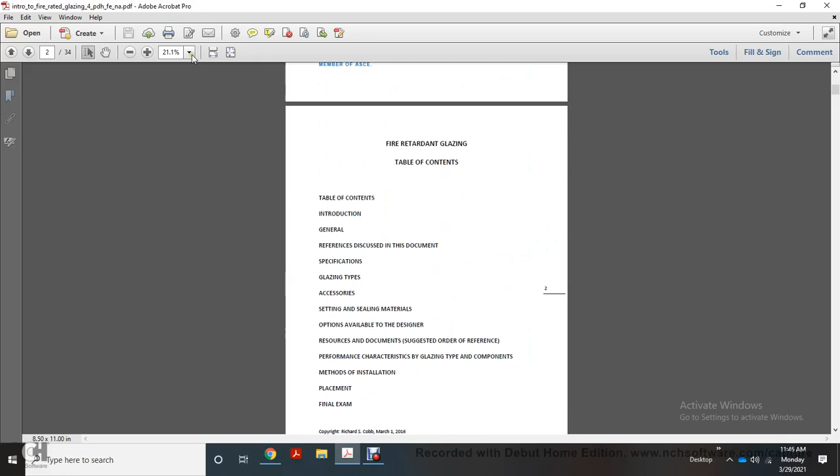Alright, fire retardant glazing table of contents. Table of contents: introduction, general reference documents discussed in this document, specification, glazing types, accessories, sealing materials, options available through the design and resource documents, suggested order reference, performance characteristics, glazing type, components, method, installation, and placement, final exam.

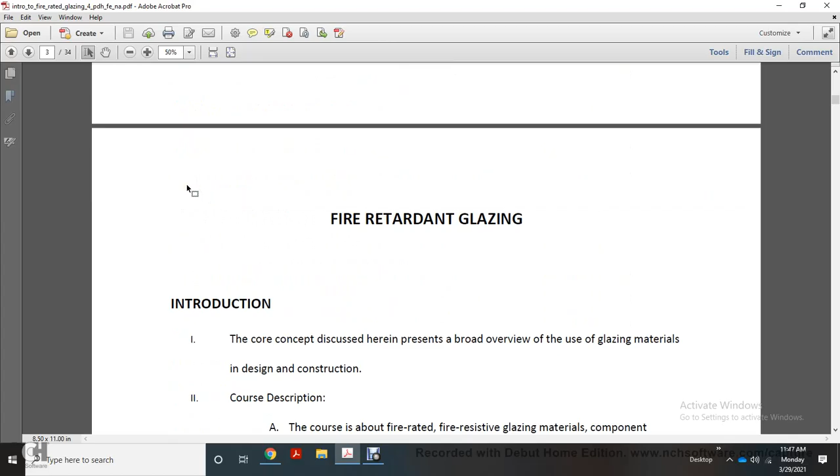Fire retardant glazing introduction. The core concept discussion here presents a broad overview of the use of glazing materials in design construction. Course description: this course is about fire-rated, fire-resistant glazing materials, components, system assemblies, including provision for separation of adjacent spaces and structures. Information supports determination of requisite measures of protection against temperature rise accompanied with flame and smoke migration.

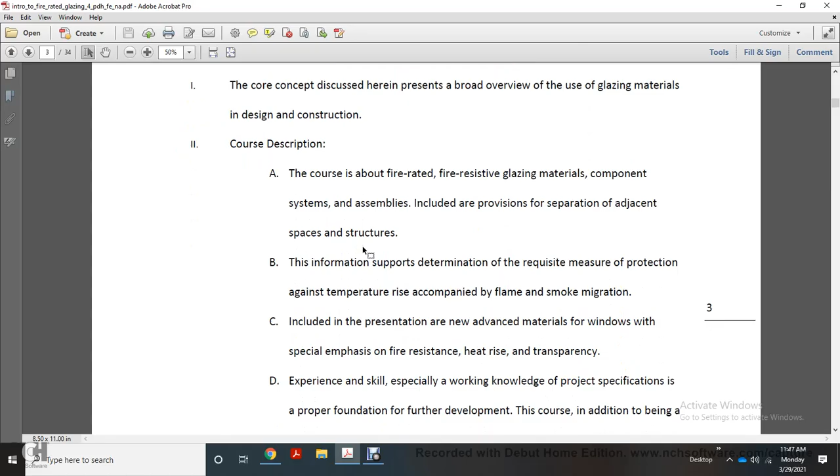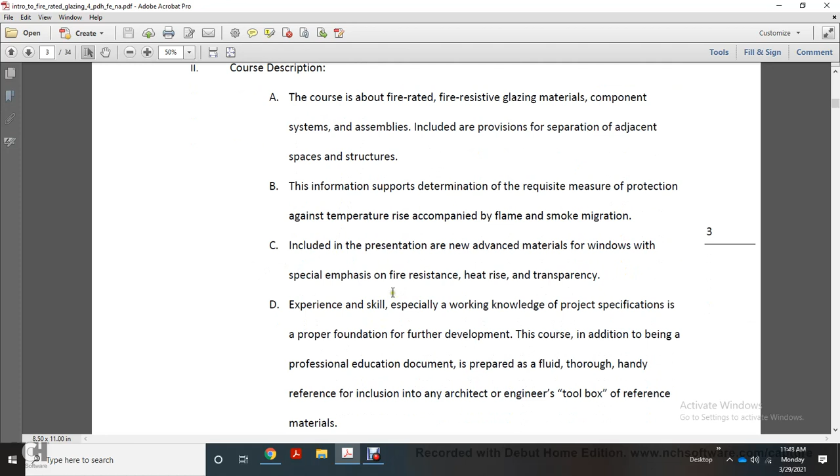Included in the presentation are new advanced materials for windows with specific emphasis on fire resistance, high heat rise, and transparency. The experience and skill, especially working knowledge of specification, provide a proper foundation for further development. This course, in addition to being professional education, is prepared as a handy reference for inclusion into the architect's and engineer's toolbox of reference materials.

Historical perspective: in 1500 BC, glass making was begun in Egypt. 3,000 years later, in 1830, John Hartley, a Scotsman, working through W.E. Chance in England, began to manufacture sheet glass. For 2 years, John Hartley began experimenting with a new German plate glass manufacture method. However, John's death in 1833 paved the way for his sons James and John.

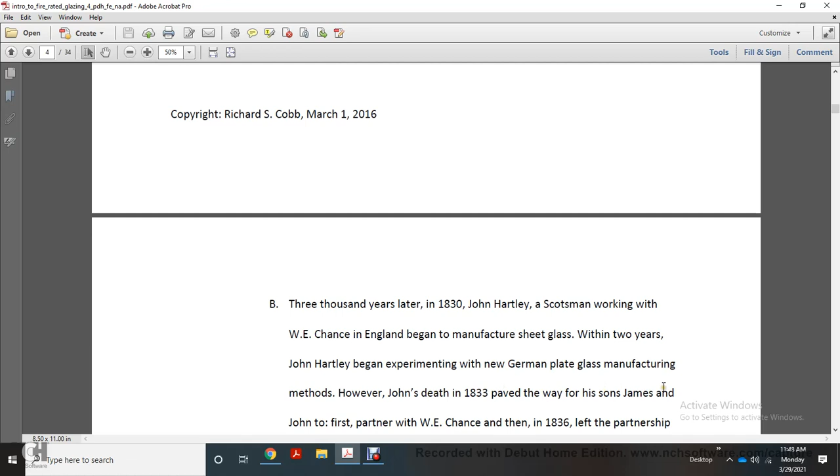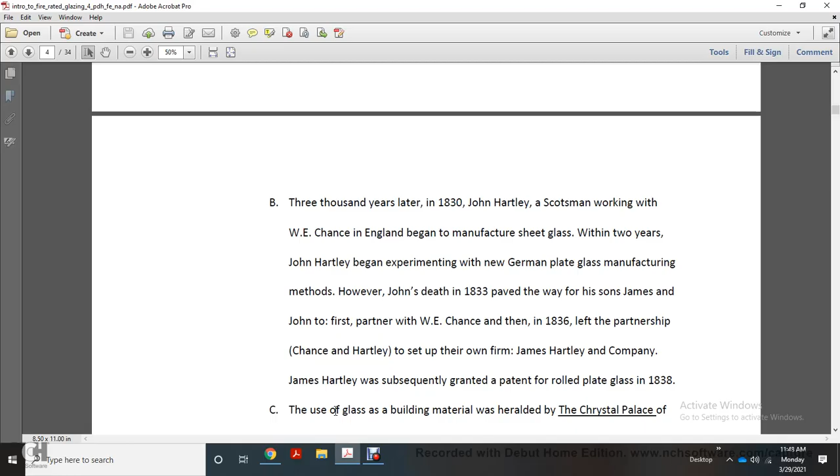First partnered with W.E. Chance, then in 1836 they left the partnership of Chance and Hartley to set up their own firm, James Hartley and Company. James Hartley was subsequently granted a patent for rolled plate glass in 1838. The use of the glass material was heralded by the Crystal Palace of 1851, built by Joseph Paxton to accommodate the Great Exhibition. In 1898, Pilkington invented wire glass for safety and security.

However, note that since wire glass exhibited low impact resistance, since 2006 the IBC has prohibited its location in all facility types. Float glass for modern windows was first proved profitable in 1960. The method of making float glass consists of the formation of a continuous sheet of glass upon a molten tin bath, which results in a uniform flat surface. Most float glass is soda lime glass, also available is borosilicate and flat panel display glass. Products superior to glass include the use of silicone and ceramic transparency.

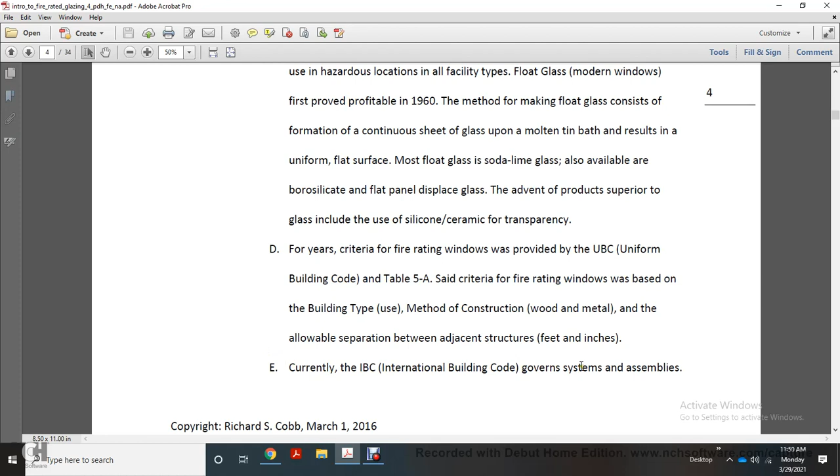Criteria for fire rating windows were provided with the UBC, Uniform Building Code. Table 5-A. Said criteria for rating windows based on window type, building type use, method of construction, wood and metal, and the allowable separation between adjacent structures in feet and inches. Currently, the IBC, International Building Code, governs systems and assemblies.

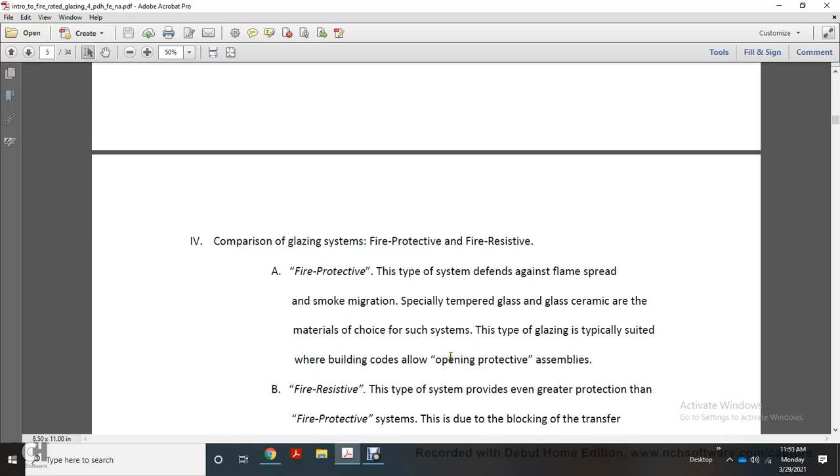Comparison of glass glazing systems, fire protective and fire resistive. A fire protective system defends against fire, flame spread, and smoke. Specially tempered glass and ceramics are the materials of choice for such systems. This type of glazing is typically suited under the building code for opening protective assemblies.

Fire resistive: this type of system provides greater protection than the fire protective system. This is due to blocking the transfer of conductive as well as radiant heat. Glass glazing of this type is suitable for applications where building codes require enclosure of interior space by fire-resistant enclosures. Examples include fire separations of 1 hour or more that also require meeting or exceeding the temperature rise guidelines, especially stairwells, exit corridors, or other required fire barriers.

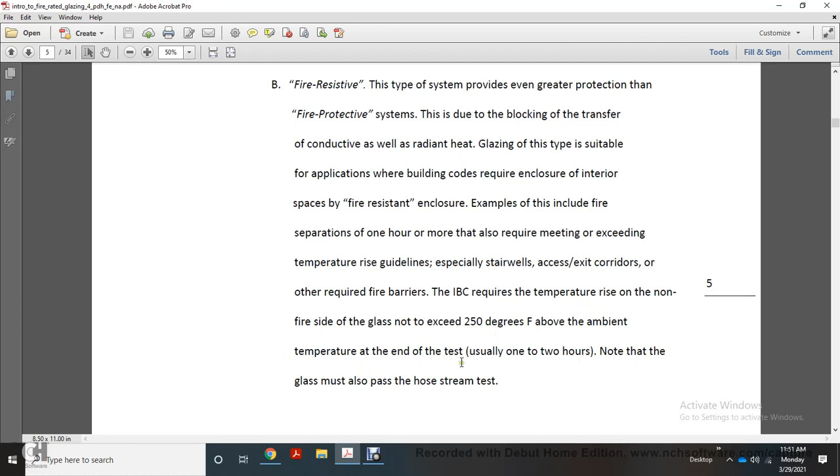The IBC requires the temperature rise on the non-fire side of the glass not to exceed 250 degrees Fahrenheit above ambient temperature at the end of the test, usually 1 to 2 hours. Note that the glass must also pass a hose stream test.

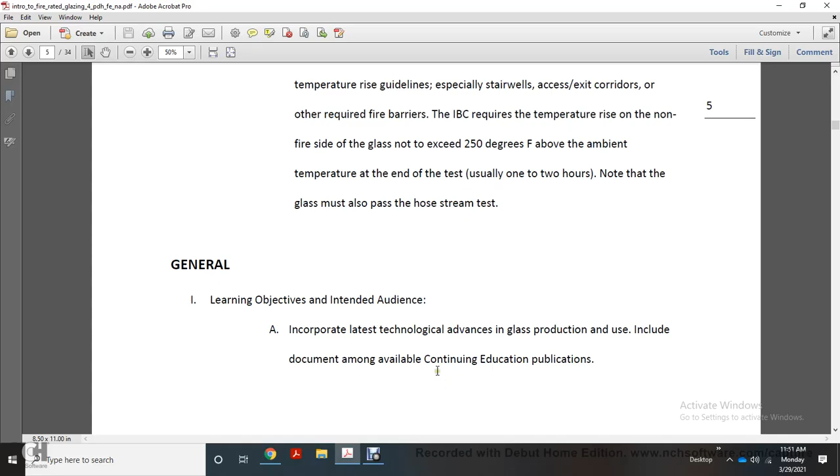General learning objectives intended for the audience incorporate the latest technology advances in glass production. Uses include the document among available continuing education publications for the practice of architecture and engineering, particularly with the state license board in general. This document is set up so a professional practitioner may use it as a quick reference guide when working with fire glazing.

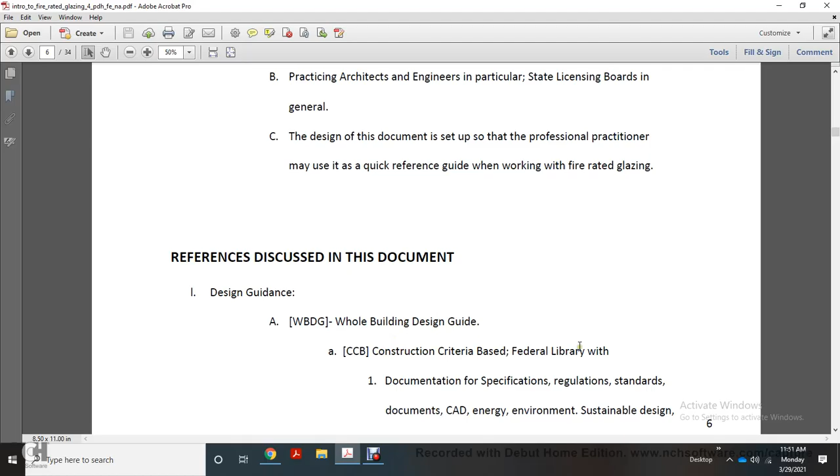Reference documents discussed in this document. Design guidance of the Whole Building Design Guide. CCB construction criteria base, a federal library with documentation, specifications, regulations, standards, CAD, energy, environmental, and sustainable design tools. Information includes experiential knowledge such as federal construction requirements, real world document references, Unified Facilities Criteria, and specs.

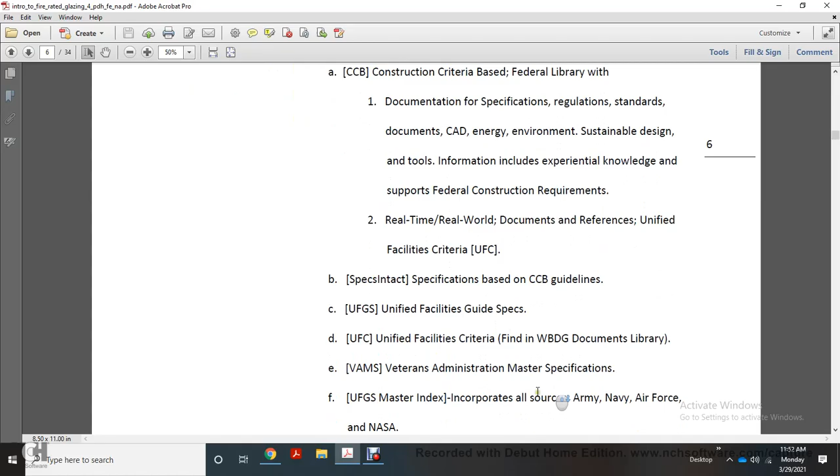Specs based on the guidelines: UFGS, Unified Facilities Guide Specifications, and UFC, Unified Facilities Criteria, found in the Whole Building Design Guide Document Library, Veterans Administration Master Specifications, and the UFGS Master Index, which incorporates all sources: Army, Navy, Air Force, NASA.

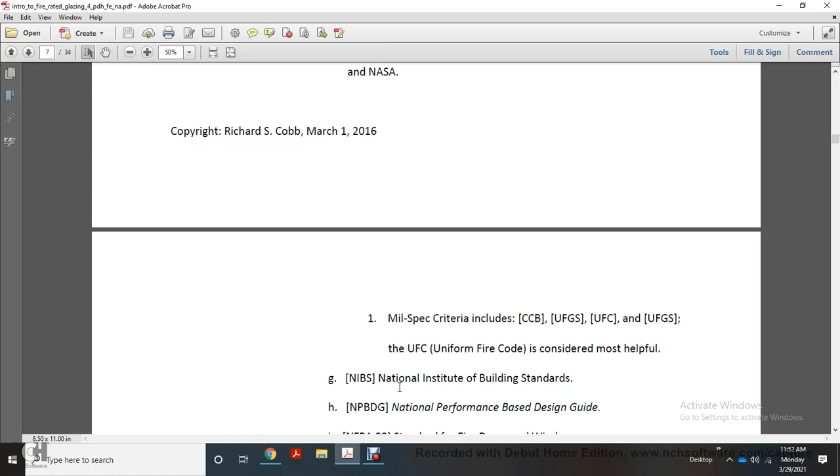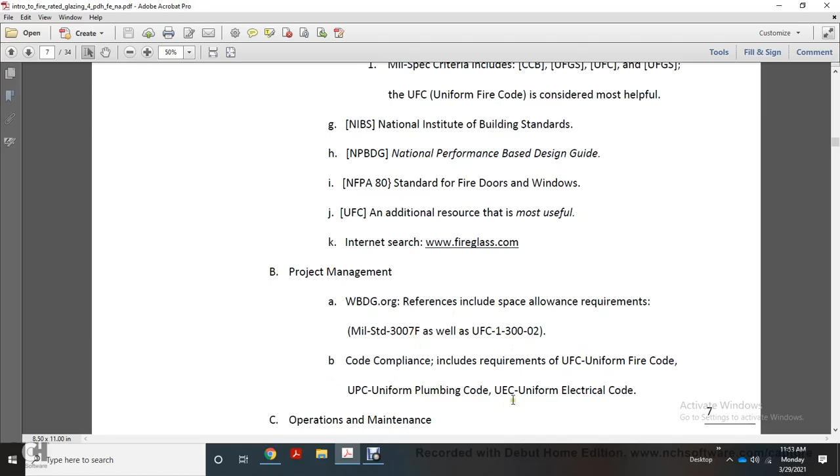Mil-spec criteria include CCB, UFGS, UFC, Uniform Fire Code, and NIBS, the National Institute of Building Standards, NPBDG National Performance Based Design Guide, NFPA 80 Standard for Fire Doors and Windows, and UFC as additional resources. Useful internet searches include www.fireglass.com, Whole Building Design Guide.org, space allowance requirements, Mil Standard 3007F, UFC 1-300-02, and code compliance requirements including UFC Uniform Fire Code, UPC Uniform Plumbing Code, UEC Uniform Electrical Code, Operation and Maintenance specs, and KSC NASA.gov Standardization Facility Construction.

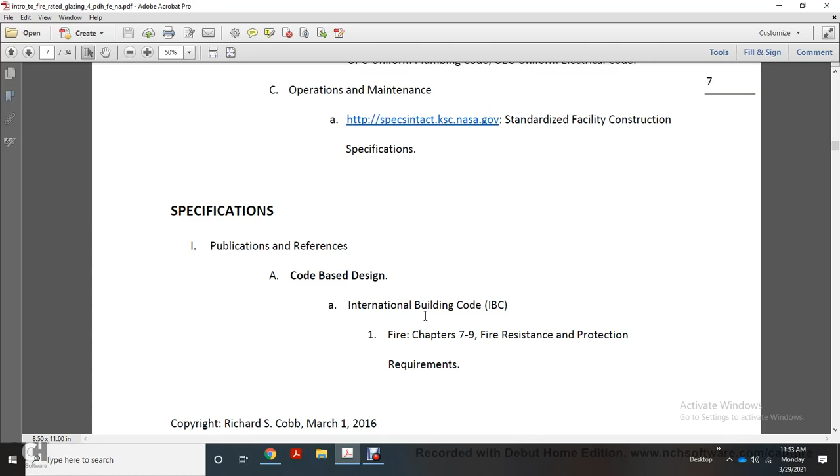Specifications and publication references for code-based design include the International Building Code Fire sections, Chapters 7 through 9, for fire-resistant protection requirements. Windows and fire windows are covered under IBC 716.6, firewalls under IBC section 705, exterior walls under IBC section 705, and glazing under IBC 703.5 and 716.5.

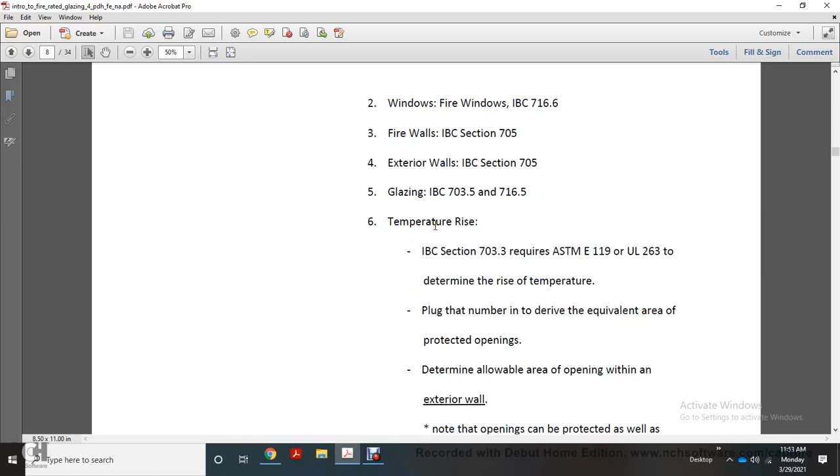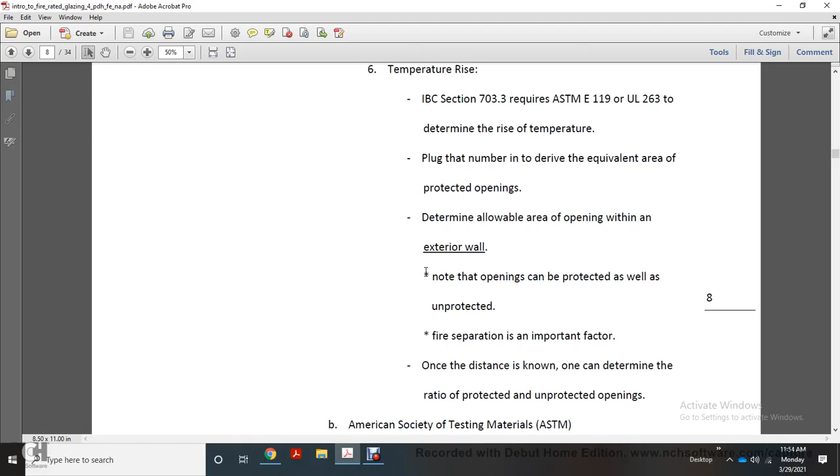Temperature rise is covered under IBC section 703.3, which requires ASTM E119 or UL 263 to determine temperature rise. Plug in the derived equivalent area of protected openings, determine the allowable area of openings in the exterior wall, and note which openings are protected versus unprotected. Fire separation distance is an important factor; once the distance is known, one can determine the ratio of protected to unprotected openings.

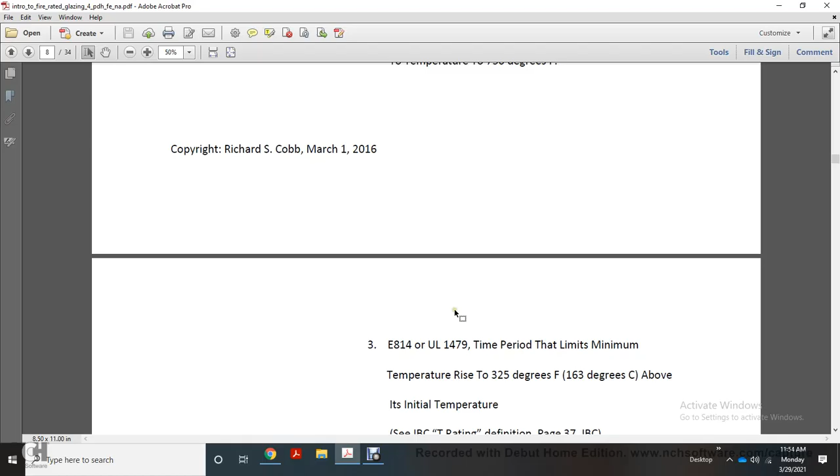ASTM E119-2012A is the standard test method for fire tests of building construction materials. ASTM E136-2012 is the test method for behavior of materials subjected to temperatures of 750 degrees Fahrenheit. E814 and UL 1479 time period limits restrict minimum temperature rise to 325 degrees above the initial temperature.

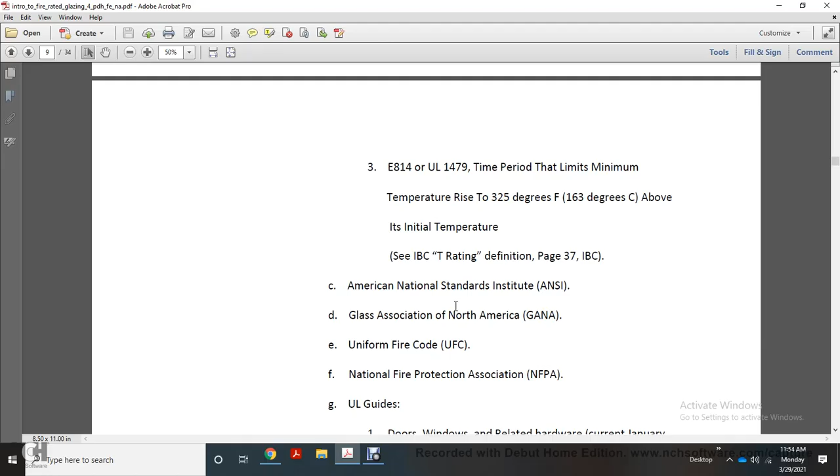See the T rating definition on page 37 of the IBC, and also reference the American National Standards Institute, Glass Association of North America, Uniform Fire Code, National Fire Protection Association, and UL guidelines for doors, windows, and related hardware, current as of January 2015, as well as the Insulating Glass Manufacturers Alliance, National Fenestration Rating Council, and U.S. Department of Energy.

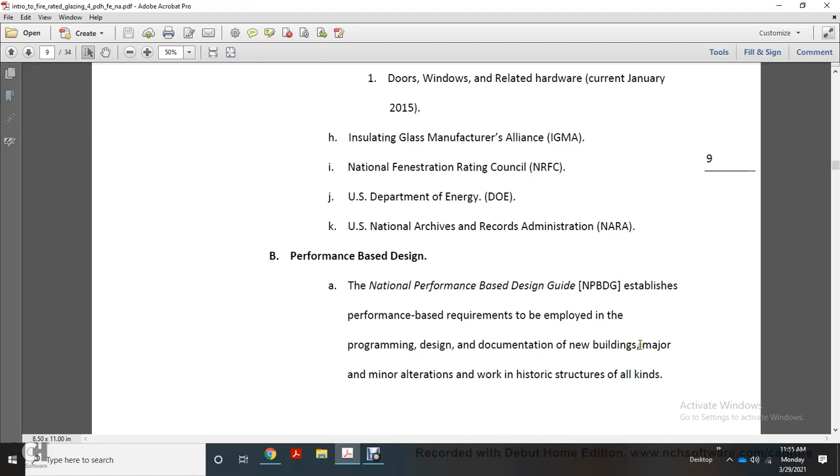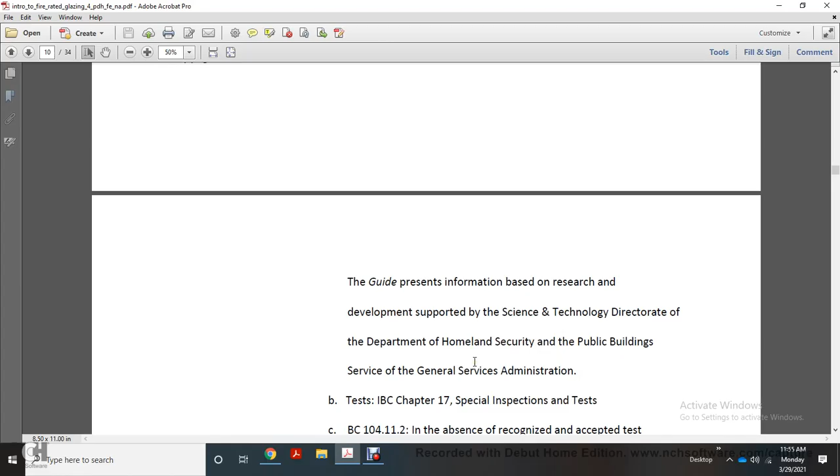Public Buildings Service of the General Services Administration testing falls under IBC Chapter 17, Special Inspections and Tests, and IBC 104.11.2: absent recognized accepted test methods, the building official shall approve the testing procedure. Independent Design Certification is covered under IBC 104.11, and alternative materials, design methods, and construction equipment under IBC 1709.5, 2406.1.1, 2408.2.1 testing.

Glazing type refers to the basic design of glazing components rated to resist the spread of fire for the period of time prescribed by the criteria, which includes the method of installation and accessories. The type of component system itself will be a noted choice for transparent glazing, varying according to design parameters.

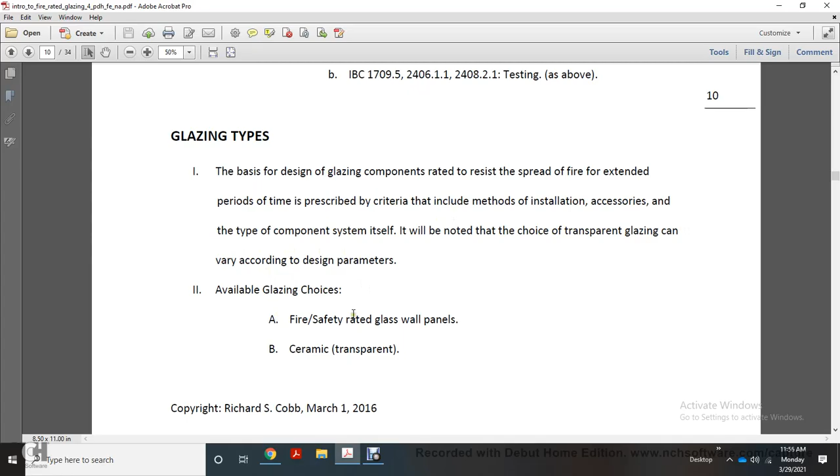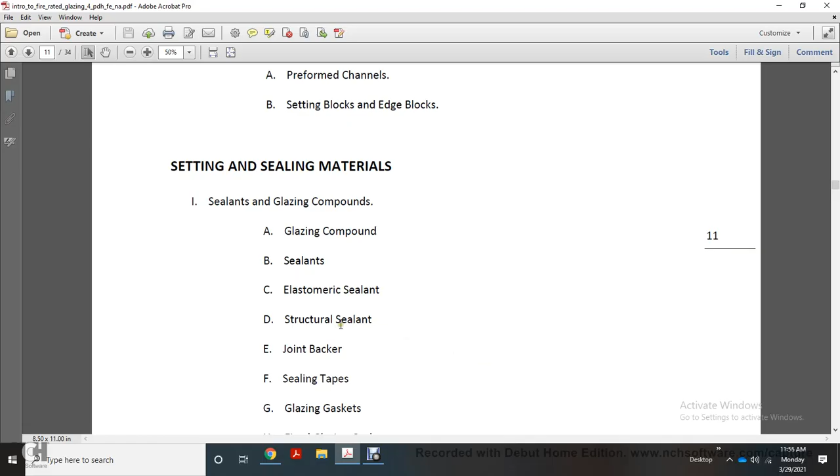Available glazing choices include fire safety rated glass, wall panels, ceramic transparent glass, specially tempered glass, and surface-applied fire rated film, as well as two-panel glazing systems with a gel intumescent insulation layer between them. Accessories and hardware include preformed channel setting blocks, edge blocks, sealants and sealing materials, glazing compounds, sealants, elastomeric sealant, structural sealant, joint backer, sealing tape, and fire glazing gaskets.

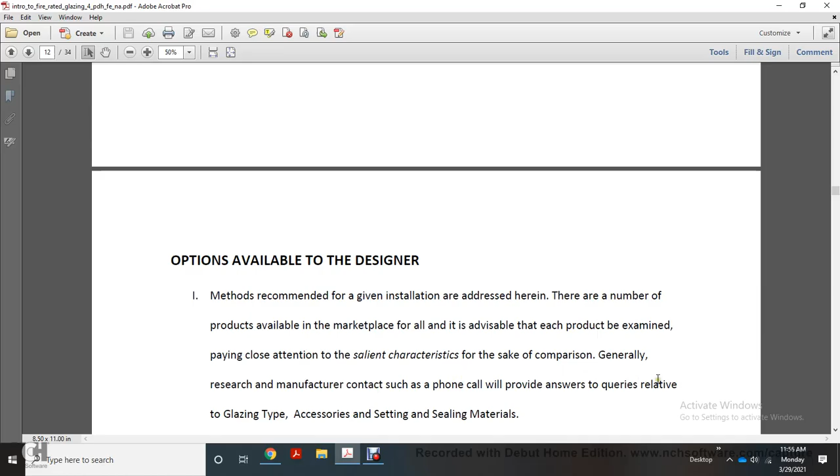These are options available to the designer, with recommended methods given for installation, addressing the number of products available in the marketplace. It's advisable to examine each product closely, paying attention to salient characteristics for comparison. Generally, contacting the manufacturer by phone will provide answers to queries relative to glazing type, accessory settings, and sealing materials.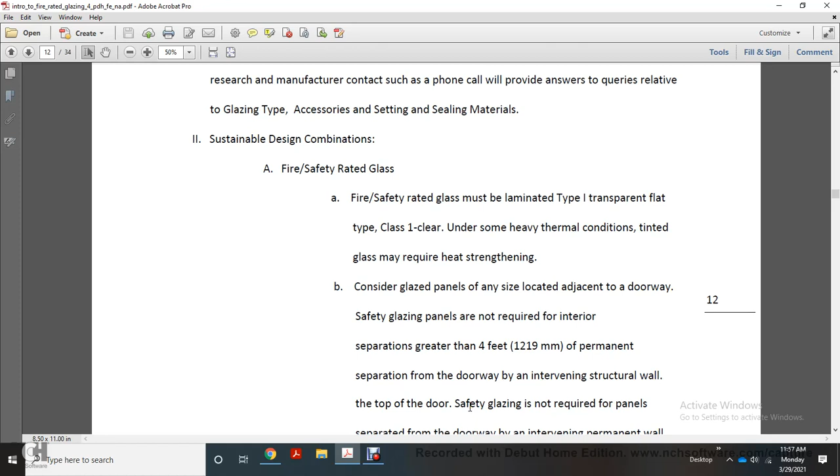Consider glazed panels of any size located adjacent to a door: glazing panels are not required for interior separations greater than 4 feet, with a permanent separation doorway intervening structural walls at the top of the door. Safety glazing is not required for panels separated by a doorway with an intervening permanent wall, for glazed panels with a surface area greater than 9 square feet where the walking surface on either side of the panel is within 36 inches of the glazing material panel.

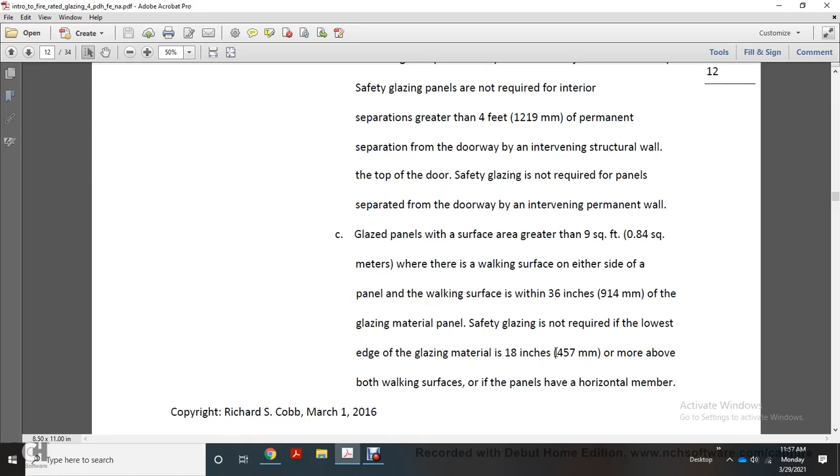Safety glazing is not required if the lowest edge of the glazing material is 18 inches or more above the walking surface on both sides, provided the panel has a horizontal member such as a mullion or permanent railing not less than 1.5 inches in width, capable of withstanding a horizontal load of 50 pounds per lineal foot on the accessible side, and the glazing is located 24 to 36 inches above the walking surface.

When insulating units are used in locations requiring safety glazing, the panels must be laminated intumescent with float glass, tested in accordance with ASTM E119. The glass must have fire ratings from 45 to 60 minutes, or 90 to 120 minutes.

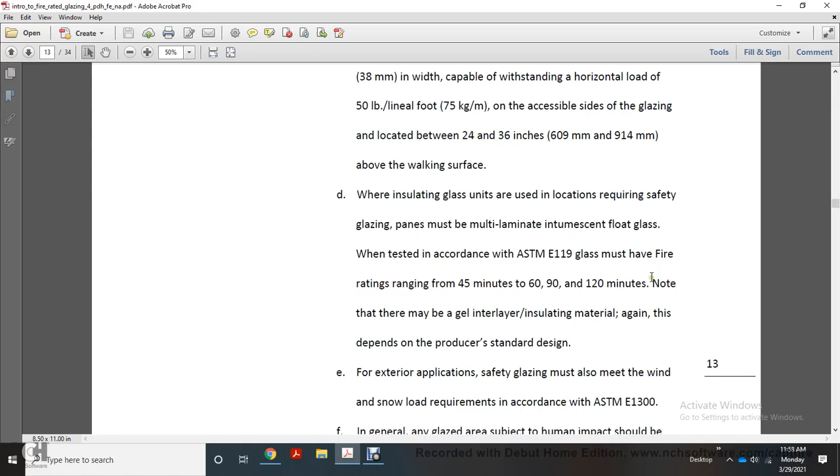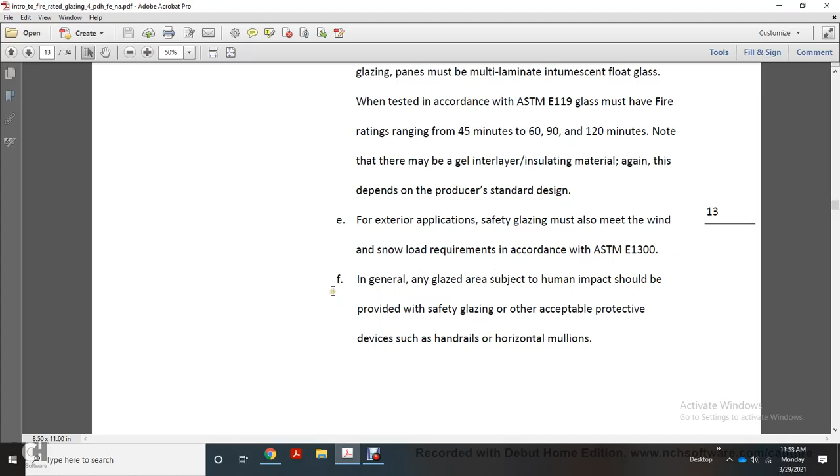There may be a gel interlayer insulating material, though this depends on the producer's standard design. For exterior application, safety glazing must also meet wind and snow load requirements according to ASTM E1300. In general, any glazed area subject to human impact should be provided with safety glazing or other acceptable protective devices such as handrails or horizontal mullions.

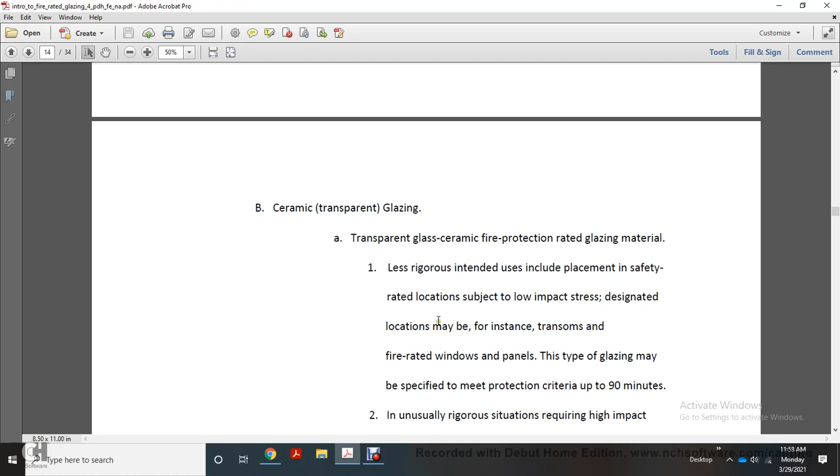Ceramic transparent glazing is a transparent glass-ceramic fire-protection rated glazing material, less rigorous in intended use include placement in safety-rated to location subject to low impact stress designated locations. For instance, transoms and fire-rated windows and panels may be specified to meet criteria up to 90 minutes. In unusually rigorous situations requiring high impact ceramic glazing meeting blast fire rated window criteria.

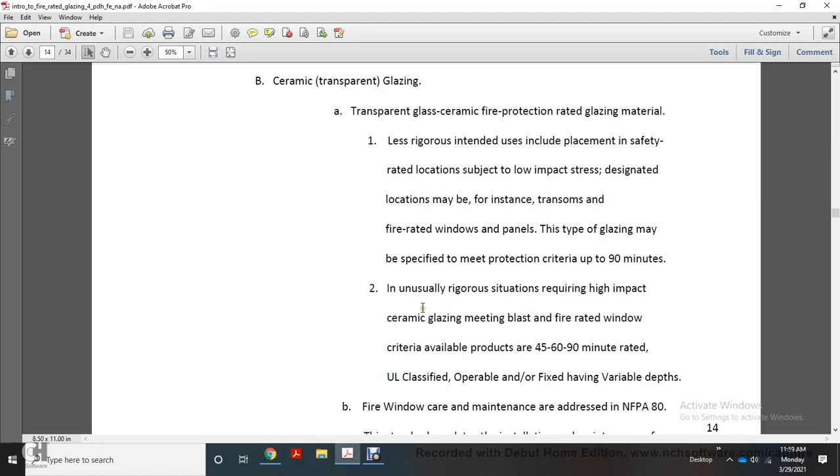Above available products are rated 45 to 60, up to 90 minutes. UL classified, operable and/or fixed, having variable depths.

Fire window care and maintenance is addressed by the National Fire Protection Association 80, a standard that regulates for the installation and maintenance of assemblies for protective openings in walls, floors, and ceilings against the spread of fire and smoke within, into, or out of the building. A feature of the National Fire Protection Association code development is that it is open and consensus based anyone can participate in the development of these documents.

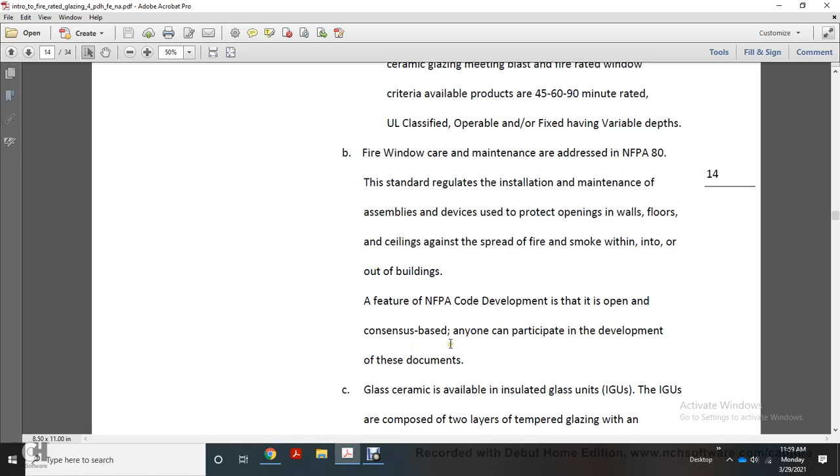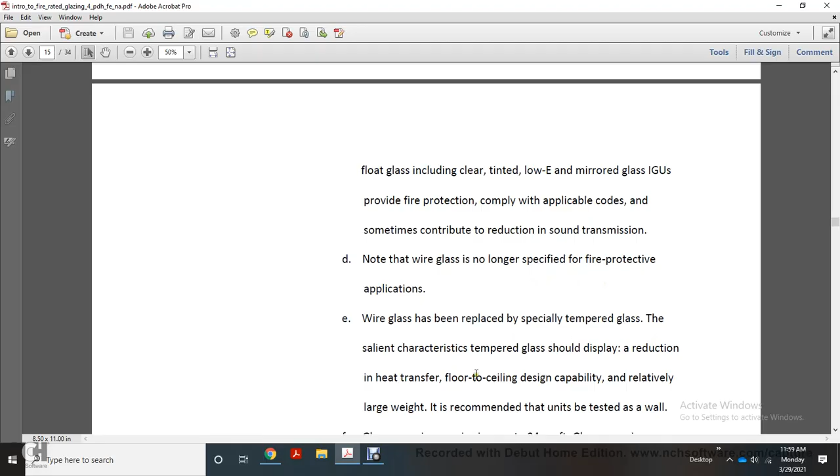Note, wire glass is no longer specified for fire protective applications. Wire glass has been replaced with specially tempered glass. Salient characteristics: tempered glass should display a reduction in heat transfer, floor to ceiling design capability, and relatively large weight.

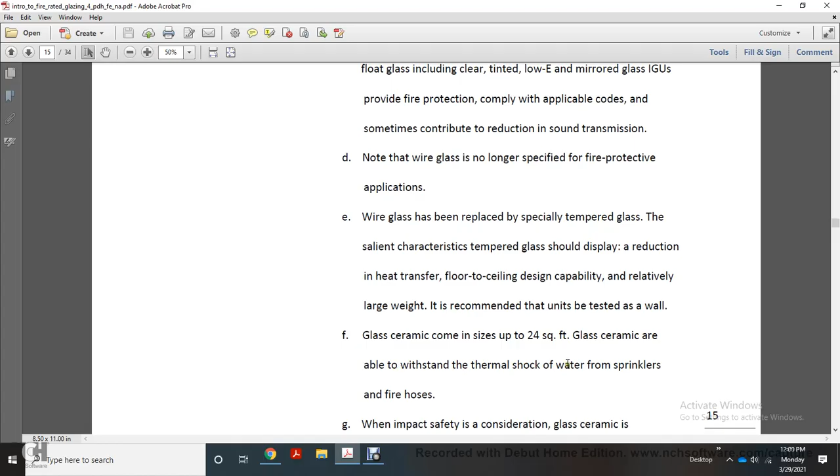Safety consideration: glass ceramic is available up to Category 2 under CPSC 16 CFR 1201. Impact safety ratings: the highest standard impact safety rating available is such that glass can safely withstand a full-grown, fast-moving adult, specifically tempered glass. Tempered glass is the preferred material for areas requiring safety glass material.

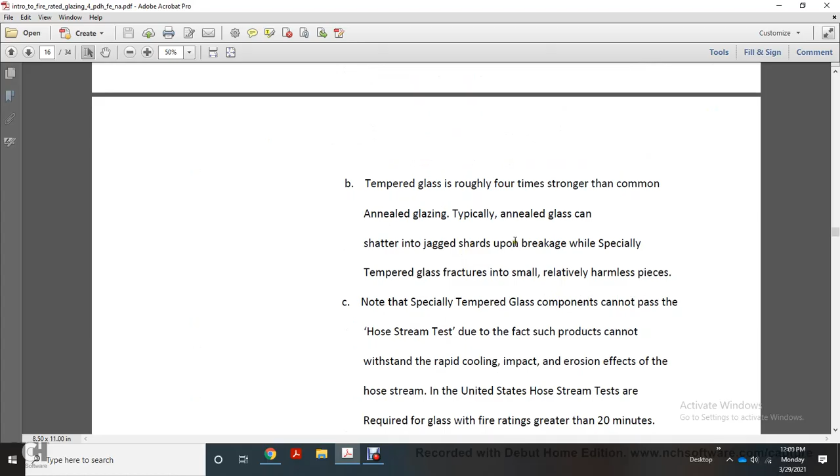Tempered glass is roughly 4 times stronger than common annealed glazing. Typically, annealed glass shatters into jagged shards on breaking, while specially tempered glass fractures into small, relatively harmless pieces.

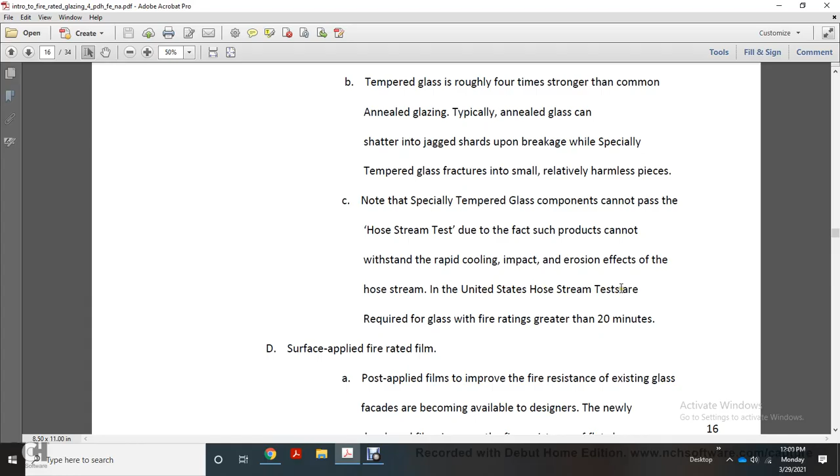Note, specially tempered glass components cannot pass the hose stream test, due to the fact that the product cannot withstand the rapid cooling, impact, and erosion effects of the hose stream. In the United States, hose stream tests are required for glass with fire ratings greater than 20 minutes.

Surface applied fire rated film. Post-applied film improves the fire resistance of existing glass, and newly developed films are now available that provide fire resistance to the flat glass surface to which they are applied.

The material is essentially a glass film made from liquid glass. Solid film is applied on both sides of the glass surface, and the product passes the ISO 834 heat curve test.

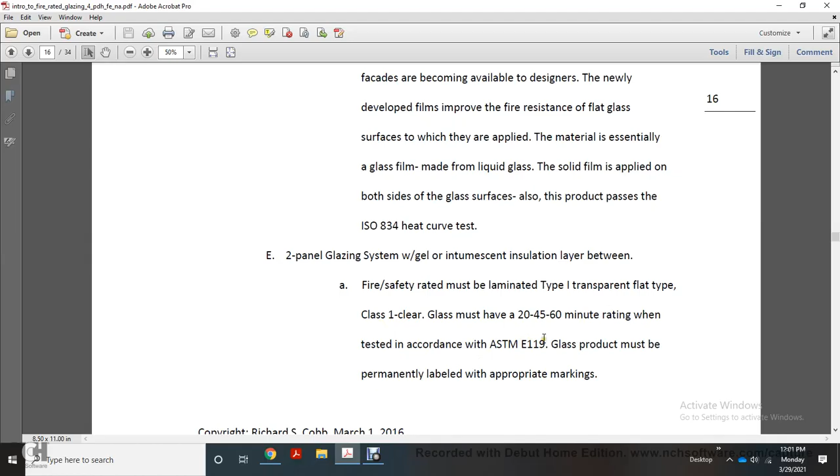Two-panel glazing system with a gel or intumescent insulation layer. The fire safety glass must be laminated type 1 transparent flat type class 1 clear. Glass must have a 20 to 45 to 60 minute rating when tested according to ASTM E119, and the product must be permanently labeled with appropriate markings.

Resource and document suggested order of reference: the Whole Building Design guide is a powerful informational foundation and guidance tool for the preparation of documentation with respect to the built environment. The Whole Building Design guide serves the building industry professional, and as previously mentioned, it is organized into 3 categories.

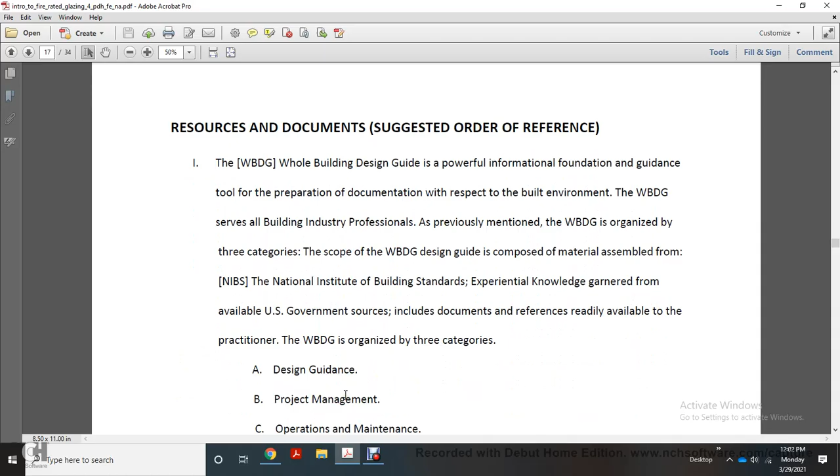Scope of the Whole Building Design guide: composed of material assembled from the National Institute of Building Standards, experiential knowledge garnered from available U.S. government sources, including document references readily available to the practitioner. The Whole Building Design guide is organized into 3 categories: design guidance, project management, and operations and maintenance.

The PBD, performance-based design example, among the few available subjects, includes future earthquake and wind engineering, nonlinear dynamic analysis, using CSI, Computers and Structures Incorporated, Berkeley, California.

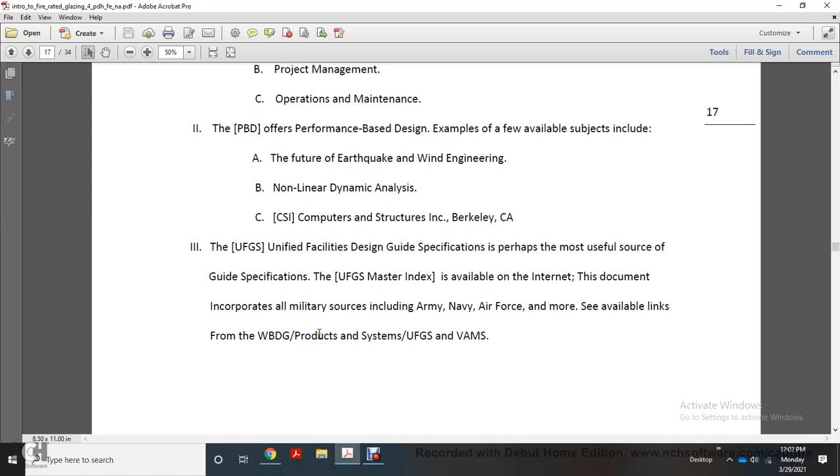The Unified Facility Design Guide specification is perhaps the most useful of the guide specifications. The UFGS Master Index is available as an internet document and incorporates military sources: Army, Navy, Air Force, and more. See available links for Whole Building Guidelines, product systems, UFGS Unified Facilities Guide Specifications, and VAMS.

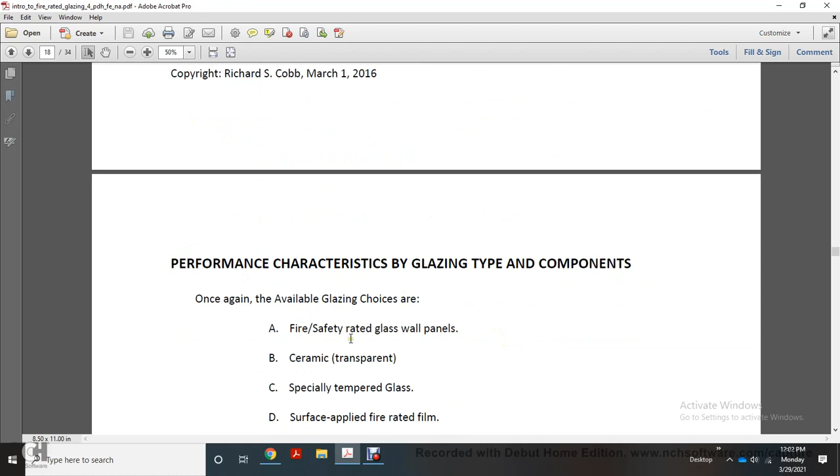Performance characteristics by glazing type and components. Once again, available glazing choices are fire safety rated glass wall panels, ceramic transparent, specially tempered glass, surface applied fire rated film, and the 2-panel glazing system with a gel or intumescent insulation layer between. Generally, each of the glazing choices presents strengths and weaknesses, particularly regarding the glazing material.

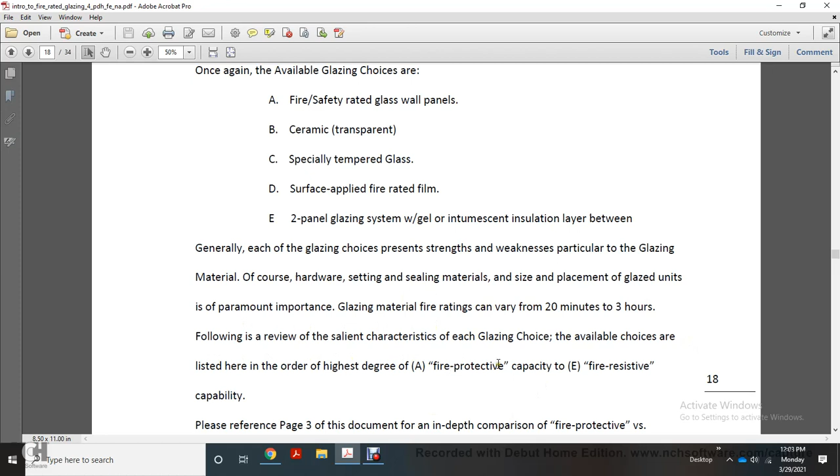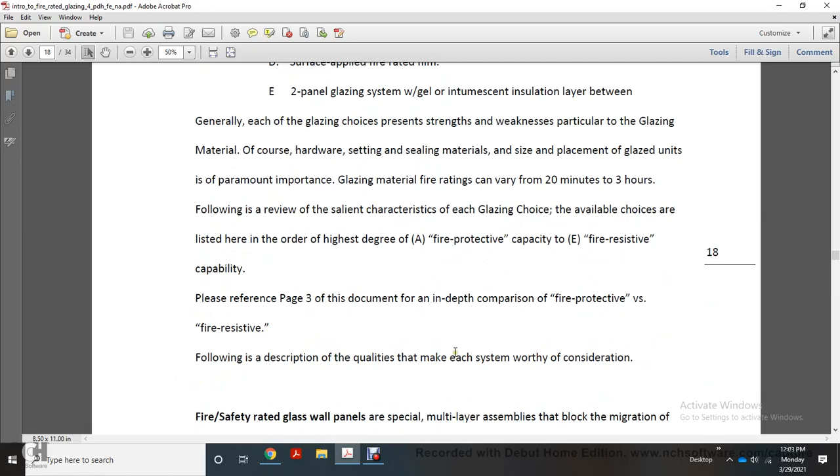Hardware, setting and sealing material size, placement, and glaze unit; paramount importance. Glazing material fire ratings can vary from 20 minutes to 3 hours following a review of salient characteristics. Glazing choices available are listed here in order: highest degree fire protective, fire protective capacity, fire resistive capability. Please reference page 3 of the document for an in-depth comparison of fire protective versus fire resistive with a description of qualities for each system worthy of consideration.

Fire safety rated glass wall panels are special multi-layer assemblies that block radiant heat transmission, tested to the same resistance standard. Solid walls are not restricted to 25% of the wall area, as may be the case with fire protective systems. This type of product is suitable for full glass doors, floor-to-ceiling designs, wall-to-wall designs, and large expanses of glass deployed. Ratings of up to 2 hours can be achieved.

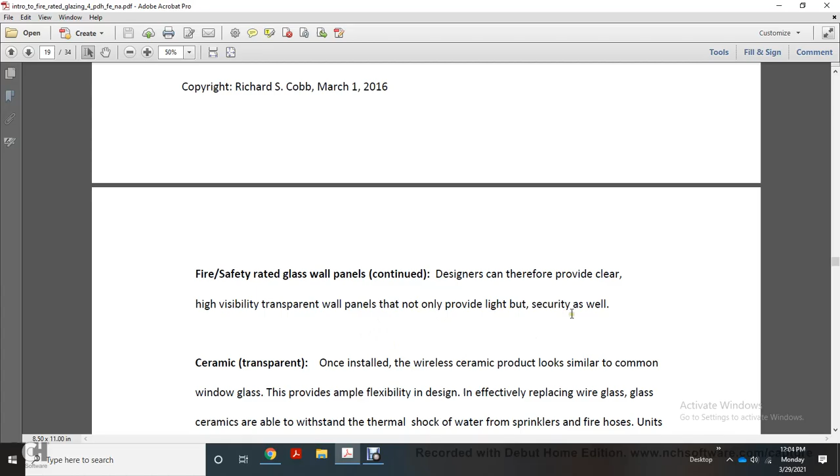Fire/Safety rated glass wall panels continue to provide clear, high visibility, transparent wall panels that not only provide light but security as well. Ceramic, transparent. Once installed, wireless ceramic products look similar to common window glass, providing ample flexibility and an effective design for replacing wire glass. Ceramics are able to withstand thermal shock.

Water from sprinkler fire hoses: units can be obtained in sizes up to 24 square feet per lite. Where impact safety is an issue, ceramic glass is available to Category 2 size standards with architectural glazing material. Under U.S. law, impact and safety ratings with high impact rating are achievable, equivalent to the impact of a fast moving, full grown adult.

In addition, the National Fire Protection Association 257 states the hose stream test provides a method of evaluating the integrity of a construction assembly for eliminating inadequate material, construction, cooling, impact, and erosion effects. The hose stream test provides an evaluation of the integrity of the specimen being tested, as required by the United States. Glass ceramics can also be specified as insulated glass units.

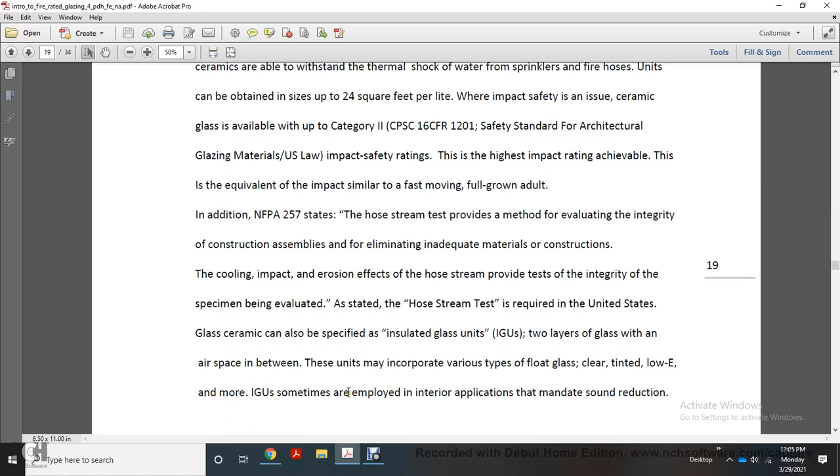Two layers of glass with an airspace between them. Units incorporate various types of float glass: clear, tinted, low-E, and more. Insulated glass units are sometimes employed in interior applications mandating sound reduction.

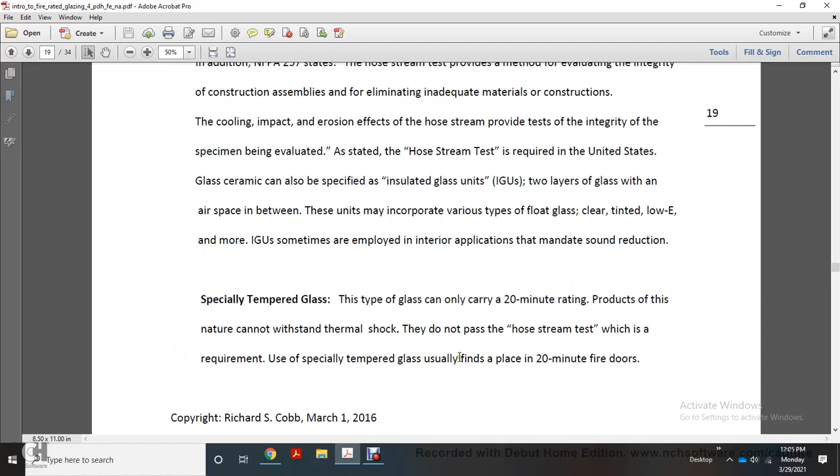Specially tempered glass of this type can only carry a 20-minute rating. Products of this nature cannot withstand thermal shock and do not pass the hose stream test, which is the requirement. Using special tempered glass usually finds its place in 20-minute fire doors.

Surface applied fire rated film: safety rated fire glass ceramic with approved surface applied fire rated film. This added measure protects and produces fire ratings ranging from 20 to 180 minutes for the film. Manufactured in 2 grades, premium and standard, with the objective of clear view as priority. Materials are used in interior applications such as doors, side lights, transoms, and borrow lights.

Premium designation ceramic glass has been polished smooth on both sides. It does not display obvious imperfections such as distortion or surface waviness.

Two-panel glazing system with a gel or intumescent insulation layer between: intumescent fire rated glazing and laminated product. Alternating layers of glass and clear intumescent layers, inner layers, depending on the number of inner layers, fire rating can reach 3 hours.

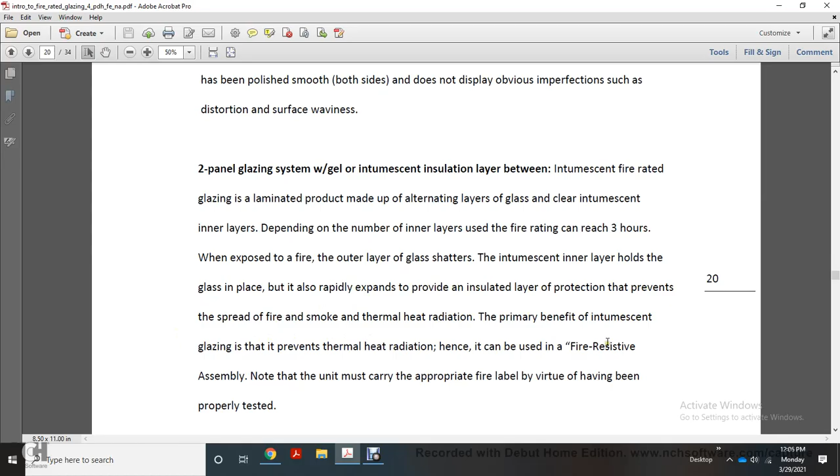When exposed to fire, the outer layer of glass shatters while the intumescent inner layer holds the glass in place, and also rapidly expands to provide an insulated layer of protection that prevents the spread of fire and smoke, and blocks thermal heat radiation. The primary benefit of intumescent glazing is that it prevents thermal heat radiation, hence it can be used in a fire-resistive assembly. Note the unit must carry an appropriate fire label by virtue of having been properly tested.

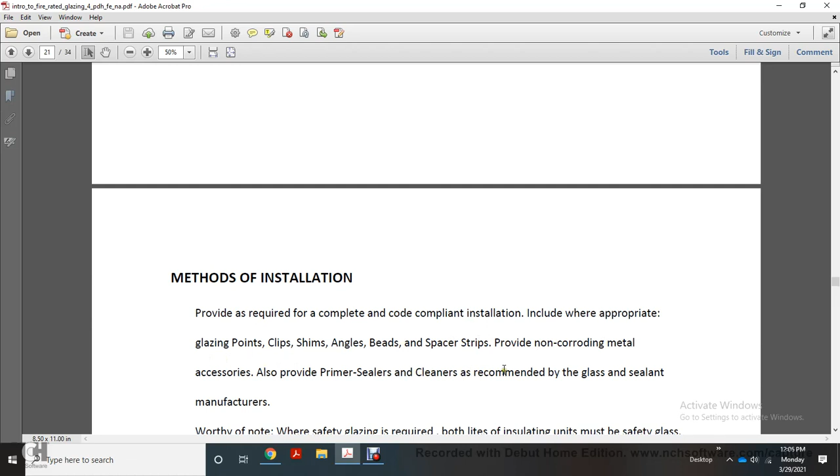Methods of installation required for complete code compliant installation include appropriate glazing points, clips, shims, angles, beads, and spacer strips. Spacer strips provide non-corroding metal accessories. All should use primer-sealers and cleaners recommended by glass and sealant manufacturers.

Worthy of note, when safety glazing is required, both lites of insulating units must have safety glass. Each light must have a permanent label.

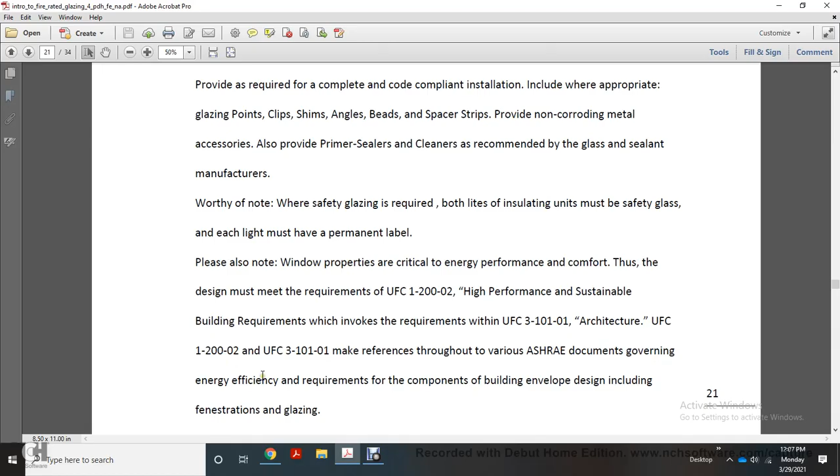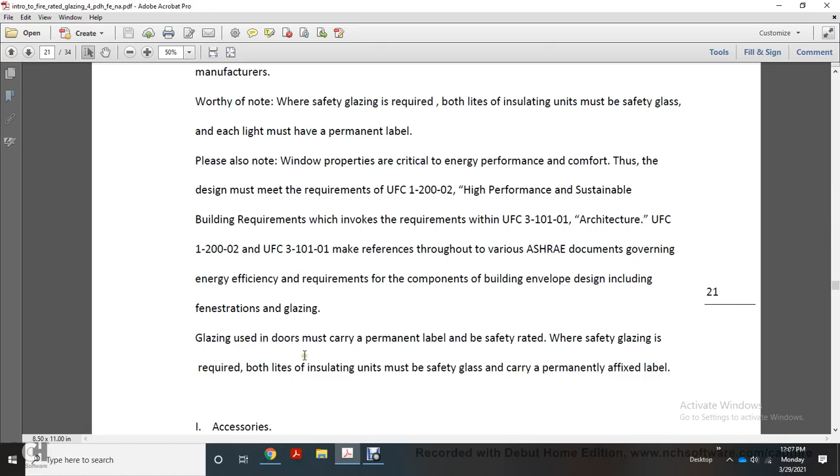Glazing used in doors must carry a permanent label and be safety rated. Safety glazing is required, both lites of insulating units must be safety glass and carry a permanently affixed label.

Accessories: joint backer. Joint backer must have a diameter size not less than 25% larger than the joint width, using the type of material recommended in writing by the glass and sealant manufacturer.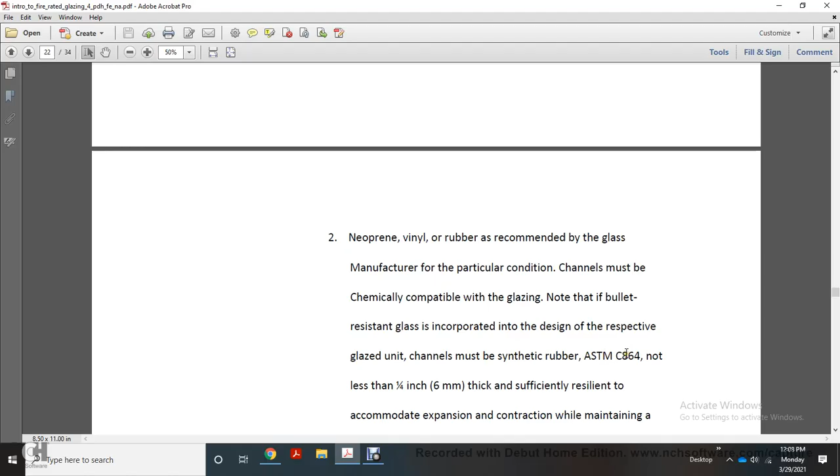Neoprene vinyl rubber recommended by glass manufacturer for the particular condition. Channels must be chemically compatible with glazing. Note: for bullet resistant glass, include a design restriction for the glazed unit. Channels must be synthetic rubber, ASTM C864, not less than a quarter inch thick, or sufficiently resilient to accommodate expansion and contraction while maintaining a vapor tight seal between the glass and frame.

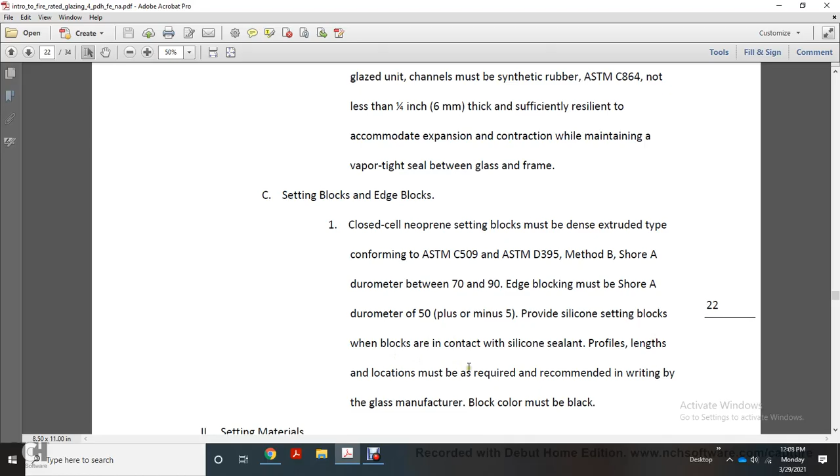Setting blocks and edge blocks: closed cell neoprene setting blocks must be dense extruded type conforming with ASTM C509 and D395 method B, Shore A durometer between 70 and 90. Edge blocks Shore A durometer 50 plus or minus 5. Provide silicone setting blocks when blocks contact silicone sealant. Provide lengths and locations as required and recommended in writing by the glass manufacturer. Block color must be black.

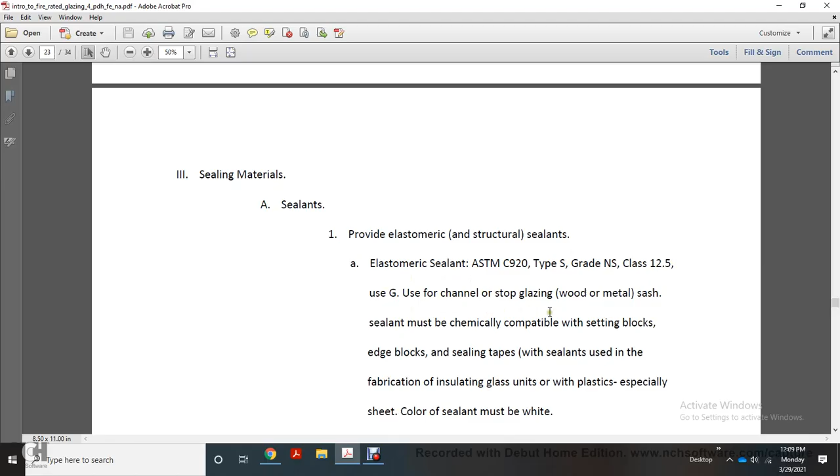Setting materials: glazing compound used for face glazing metal sash. Do not use with insulating glass units or laminated glass. Sealing material: sealant, provide elastomeric structural sealant ASTM C920 type S, grade NS, class 12.5, use G. Channel stop glazing wood and metal sash sealant must be chemically compatible with setting blocks, edge blocks, sealing tapes, with sealant used in fabrication of insulating glass units, and with plastic sheet. Color must be white. Structural sealant ASTM C1184 type S.

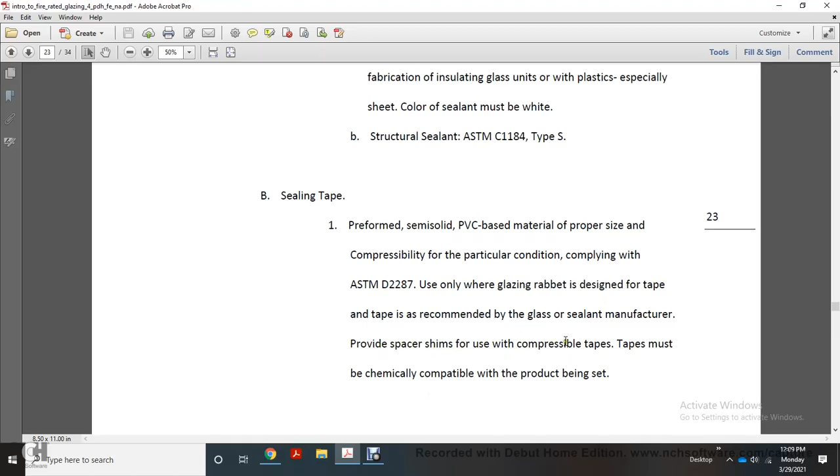Sealing tape: preformed semi-solid PVC based material of proper size and compressibility for the particular condition, complying with ASTM D2287, only where the glazing rabbet is designed for tape and tape is recommended by the glass or sealant manufacturer. Provide spacer shims. If using compressible tapes, tapes must be chemically compatible with the product being set.

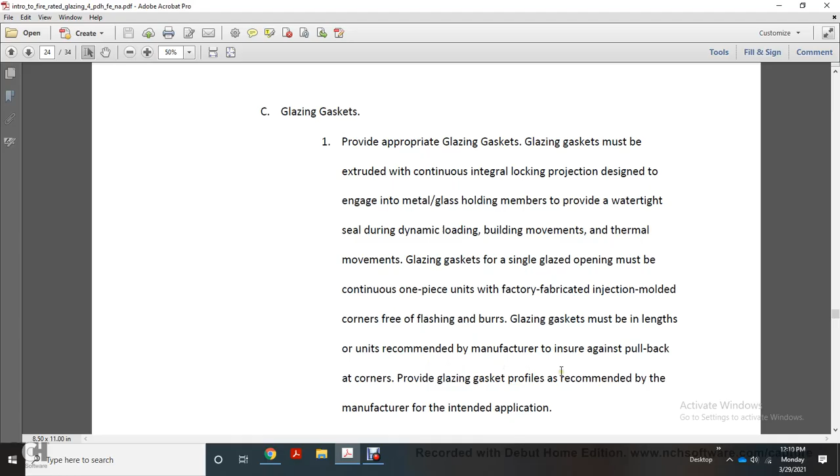Glazing gaskets: provide appropriate glazing gaskets. Glazing gaskets must have continuous integral locking projection designed to engage metal glass holding members to provide watertight sealing under dynamic loads, building movements, and thermal movements. Glazing gaskets for a single glazed opening must be continuous one piece with factory fabricated injection molded corners free of flashing and burrs. Glazing gaskets must be in lengths or units recommended by the manufacturer to ensure against pullback at the corners. Provide gasket seal. Glazing gasket profile as recommended by the manufacturer for the intended application.

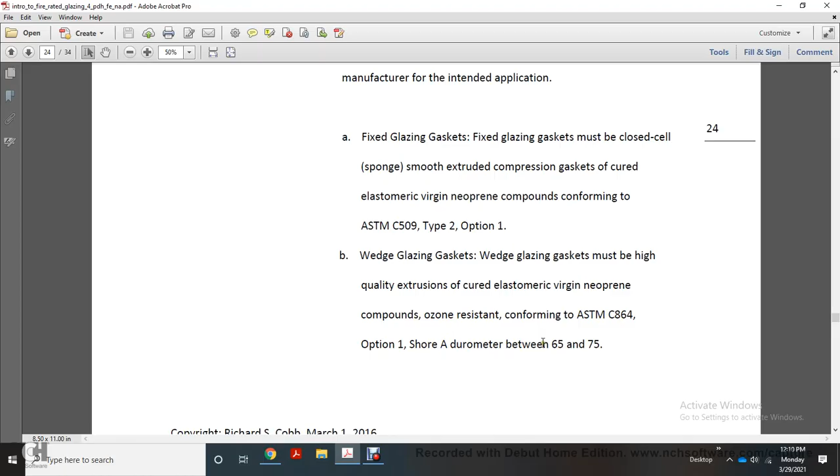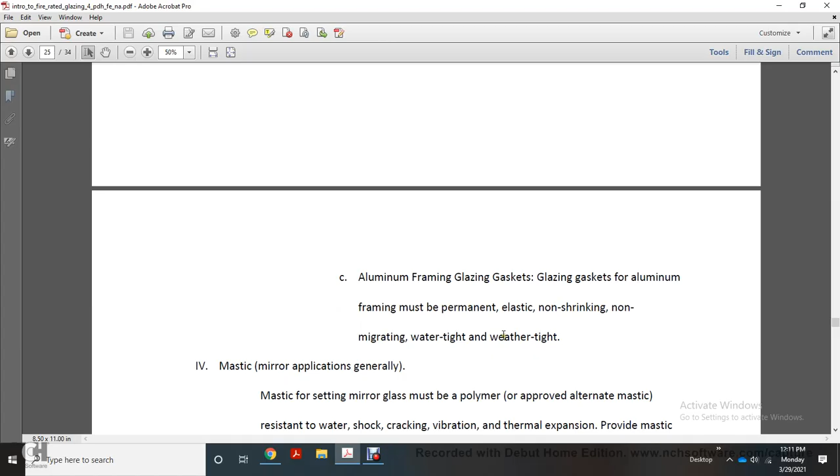Fixed glazing gaskets must be closed cell sponge, smooth, extruded compression gasket cord, elastomeric virgin neoprene compounds conforming with ASTM C509 Type 2 Option 1. Wedge glazing gaskets must be high quality extruded, cured elastomeric virgin neoprene compounds, ozone resistant, conforming with ASTM C864 Option 1, Shore A durometer between 65 and 75. Aluminum framing glazing gaskets: glazing gaskets for aluminum framing must be permanently elastic, non-shrinking, non-migrating, watertight, weather tight.

Mastic for mirror application: generally, mastic for setting mirrors must be polymer approved, with mastic resistant to water, shock, cracking, vibration, and thermal expansion. Verify mastic compatibility with mirror backing and surface coatings approved by the manufacturer before placement. Any materials that show visual evidence of biological growth due to the presence of moisture must not be installed in the building project. Preparation: unless otherwise specified, work must conform with the applicable recommendations of the GANA Glazing Manual, GANA Sealant Manual, IGMA TB 3001, IGMA TM 3000, and manufacturer recommendations.

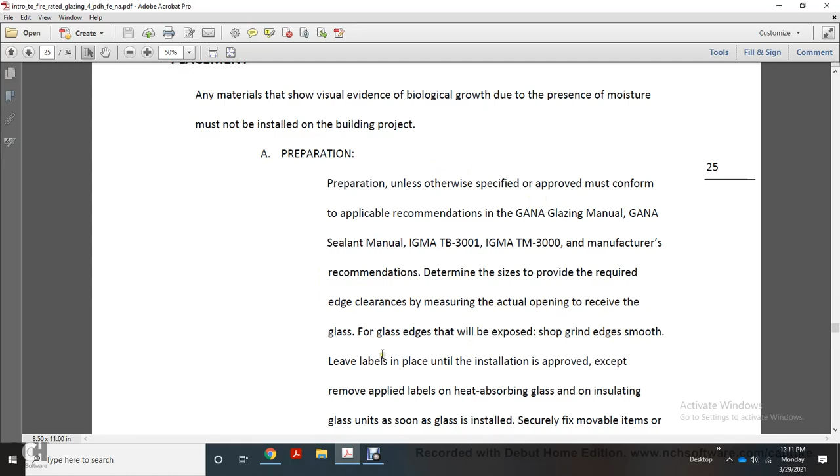Determine the sizes to provide the required edge clearance by measuring the actual openings to receive the glass. Edges of exposed glass should be shop ground smooth. Leave labels in place until installation is approved, except remove them from heat absorbing glass and insulating glass units. Securely fix movable items and keep them closed in the locked position until the glazing compound is set.

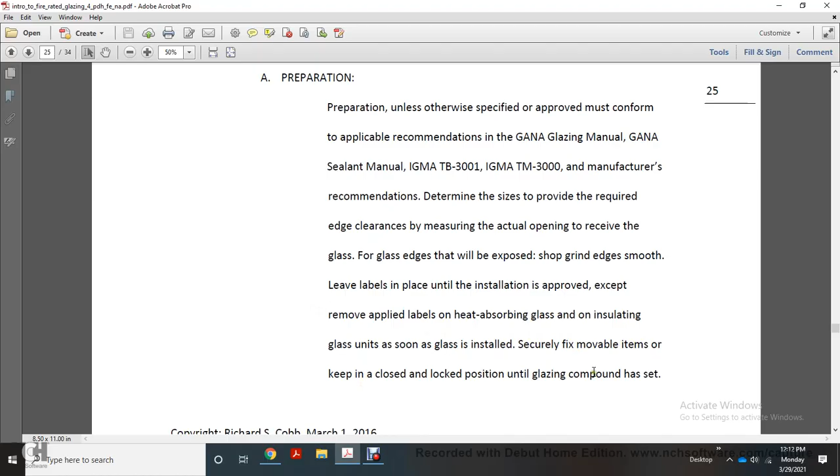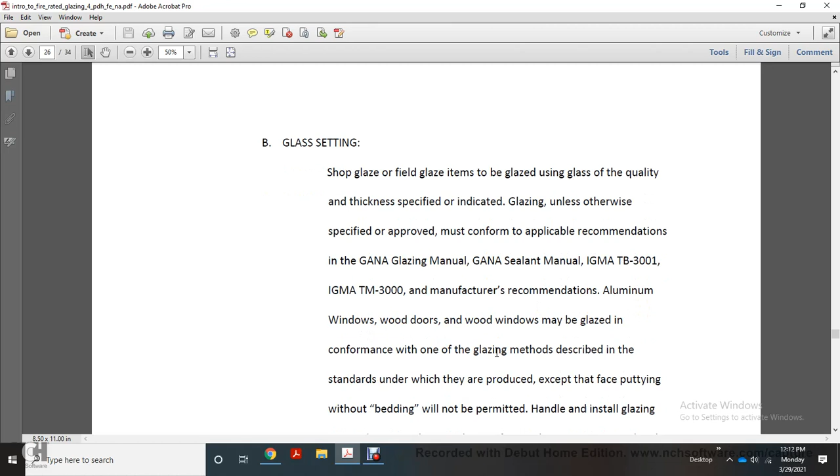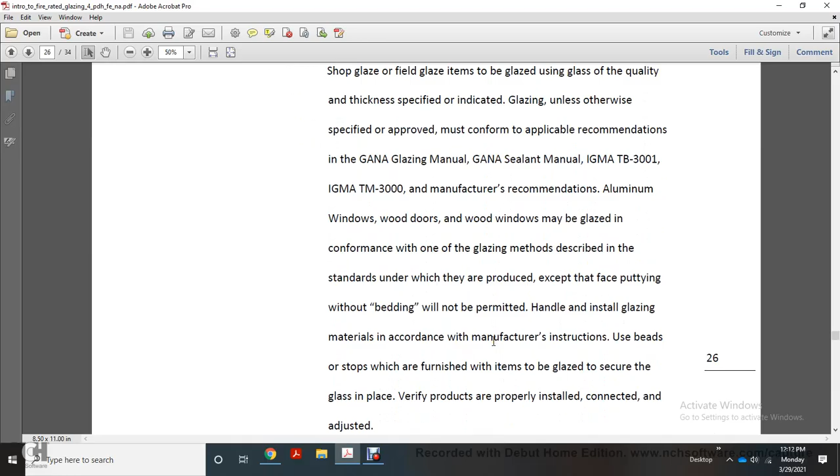Glass setting: glaze items with glazing units and glass of the quality and thickness specified or indicated. Unless otherwise specified, glazing must conform to the applicable recommendations of the GANA glazing manual, GANA sealant manual, IGMA TB 3001, IGMA TM 3000, and manufacturer recommendations. Aluminum windows, wood doors, and wood windows may be glazed in conformance with one of the glazing methods described in the standards under which they are produced, except that face puttying without bedding will not be permitted. Handle and install glazing material according to manufacturer instructions. Use bead stops furnished with the items to be glazed to secure the glass in place. Verify products are properly installed, connected, and adjusted.

Protection: protect glass work immediately after installation. Identify glazed openings with suitable warning tapes, cloth, or paper flags attached with non-staining adhesives. For reflective glass, use protective material that eliminates any contamination of the reflective coating. Place protective material far enough away from the coated glass to allow air to circulate and prevent heat buildup and moisture accumulation on the glass. Remove and separate protective materials for reuse or recycling. Remove and replace broken, chipped, cracked, abraded, or otherwise damaged glass units, including new units damaged during construction activity.